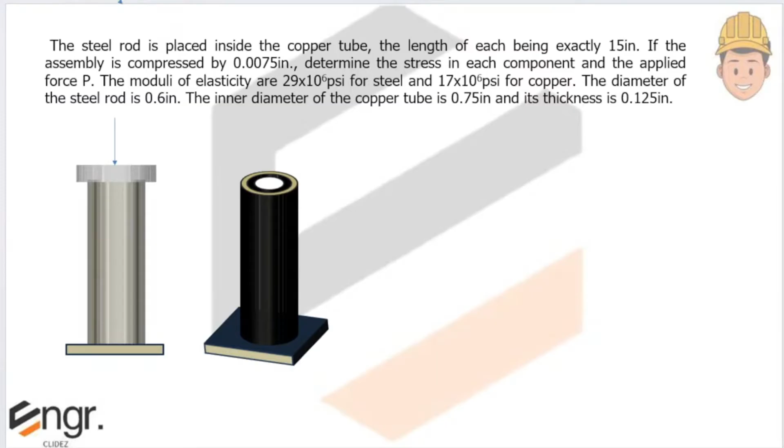Now, I think na ito lang muna yung last. Tapos sa remaining meetings, ito naman, yung mga remaining problems. Medyo marami pa kasi. Now, itong problem na to, merong approximate na method. Meron ding actual method. Na yung first na ituturo ko is yung actual method muna, para magets nyo talaga yung concept dyan, what we are trying to solve sa problem na to.

So in this problem, we have daw a rigid bar BC. And it is supported by the steel rod AC na merong cross-sectional area na 0.25 inches squared. We have to find the vertical displacement of point C caused by the 2,000 pound load. Use E equals 29 times 10 to the 6 PSI for steel. So yung first natin isosolve dyan is the deformation in AC.

Now, yung bar BC daw is rigid. Diba kapag rigid, statics of rigid bodies, review natin, kapag sasabing rigid, hindi siya magde-deform. So, yung BC pala, it will neither shorten nor elongate. So, it will remain the same. Pero yung AC is allowed to deform. So, again, this is rigid. This is important sa calculation for the vertical displacement. So, first natin gagawin is to solve the force in AC.

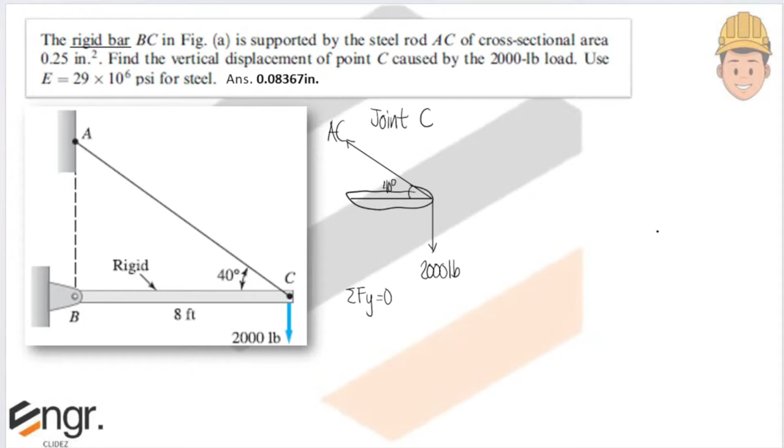So summation of forces na lang along the y direction. This is equal to 40 degrees. No need yung horizontal component. So we would have AC sine of 40 degrees is equal to 2,000. Sinum up na lang natin yung upward saka downward force. Ito yung vertical component ng AC. So solving AC, 2,000 divided by sine 40, we would get 3111.45 pounds.

Now notice na itong AC, naka-incline yan. Therefore, if we are to calculate the deformation, then yung deformation na makukuha natin is also parallel to this inclined length. So, parang ito yan. Ito yung AC. So, once solving the deformation, ito yung makukuha natin, parallel sa member. Delta AC. Yung formula ng deformation is equal to PL divided by AE. Now, alam na natin yung force. The force is equal to 3,111.45. Naka-pounds na yan. No need to convert.

Then, our length naman is still unknown. Now, usually, yung students nagkakamali since yung 8 feet yung gagamitin, kasi yun yung explicitly nakalagay sa problem. But again, we are looking at this length. Yan yung member na kinoconsider natin. So we have to solve the length of AC. We can do that by using trigonometry. Now we have 40 degrees. Ito yung side na adjacent sa kanya. Tapos yung AC naman, yan yung hypotenuse. So what trigonometric function relates the adjacent side sa hypotenuse? Di ba? Cosine.

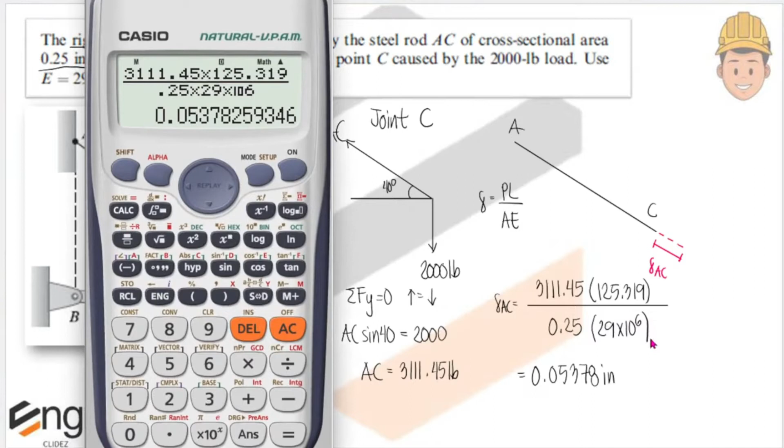So, naka-inches na yan. However, hindi pa yan yung sagot, since this is still the deformation of member AC. Hindi pa yan yung vertical displacement of point C. Yan kasi yung hinahanap natin sa problem. So first, I will discuss the actual way talaga, kung paano mo masosolve yung vertical displacement dito sa point C. So ito yan.

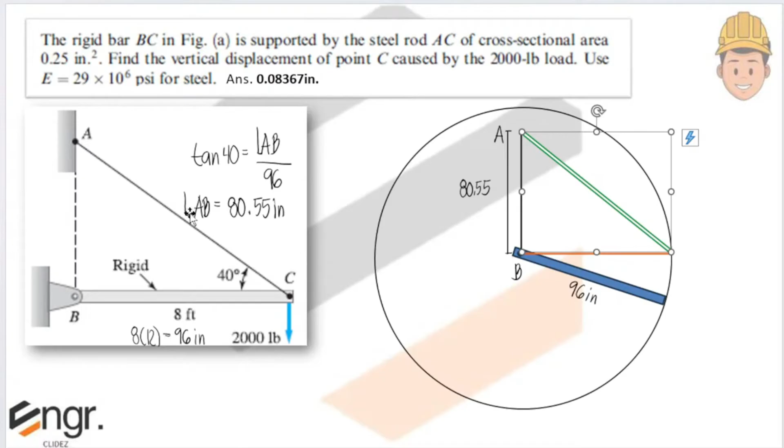This is BC. At the initial condition, it's just horizontal. So, this is BC. And then, this distance is AC, cable AC. But once the load was applied, AC deformed, it elongated. So that's why the bar moved down. So the final length is this. Still from point A, but it has elongated up to there.

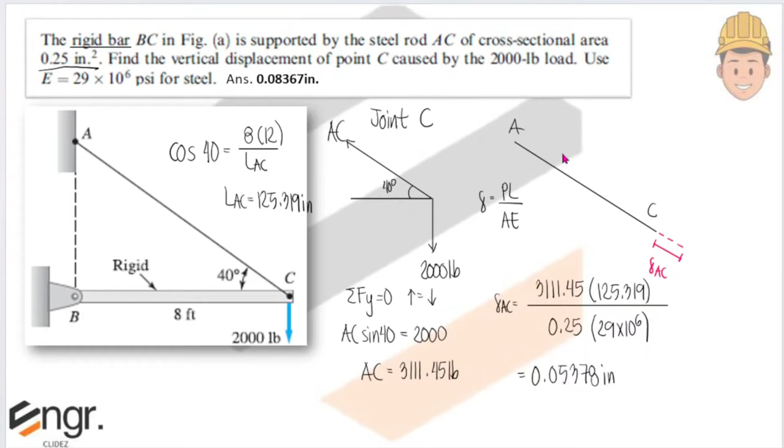So let's label it. This is C. And this is C prime, the final location of C. And this length was originally 96 still, but we don't need that in our calculation. What we need is this triangle. Now, the one in purple is the deformed length. LAC is 125.319 plus the deformation of AC, that's its total length. So LAC prime is equal to 125.319 plus 0.05378, which becomes 125.37278. So we now have AC prime.

Now, we have three sides of the triangle. When you have three sides, you can apply the cosine law to solve any interior angle. Now, what interior angle do we need to solve? We have to solve this interior angle, since once we solve that, we can get the vertical displacement. The vertical displacement is essentially what's being asked, the vertical displacement of point C.

This is the initial point C. This is its final point. So we are trying to find this vertical distance. To find it, we need this angle. Then just subtract 90 degrees so we get that smaller angle, because this was initially perpendicular. So solving this angle, I'll label it as theta.

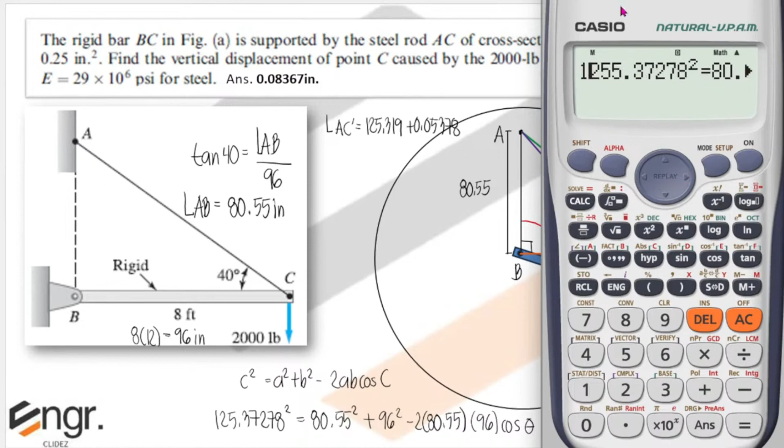Teka lang. Bakit syntax error? Dalawang multiplication symbols pala. Bakit can't solve? 1, 2... okay. Naging dalawa yung 5 dyan. Ayan. So, we would get 90.05198271. Yan yung theta. 5 decimal places.

So, try to notice na itong angle na to, maliit talaga yan. So, solve natin yung maliit na angle na yan. This is equal to alpha. So, alpha is equal to theta minus 90 degrees. Medyo obvious naman, minus 90 yan. Yung matitira na lang is itong nasa decimal. So, 0.05198 degrees. Lagyan ko na lang ng A equals theta minus 90. So, kapag meron ka ng alpha, you can now get this distance.

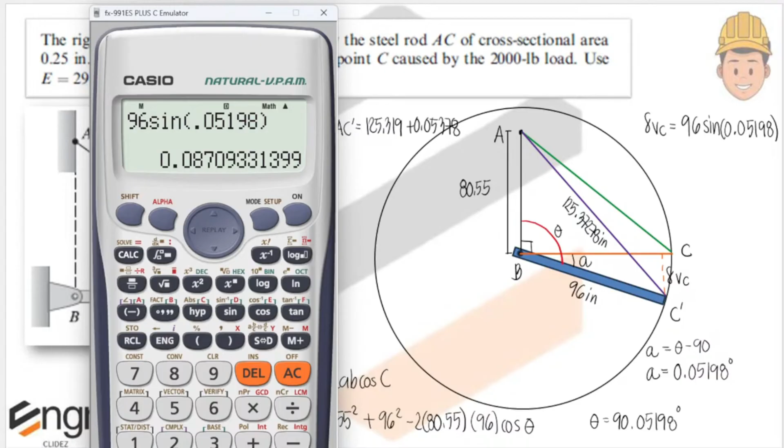Ito yung vertical displacement at C, or delta VC na lang. So, delta VC is equal to, ano yan? Diba, this is 96. Yan yung hypotenuse ng triangle. Tas, ito yung opposite to the reference angle. So, automatic na lang, 96, then sine of this angle alpha. Now, angle alpha is 0.05198. So, calculating the vertical displacement at C, we get 96 sine 0.05198. Ayan. So, magiging 0.087.

Tapos, naka-inch. Ayan. Now, ito yung actual talaga na sagot. Pero, dun sa libro, ito yung nasa answer key: 0.08367. So, makikita nyo naman na up to the second decimal place, same lang sila. But essentially, merong discrepancy since naka-inches kasi yan. Usually, kapag mm, walang masyadong difference.

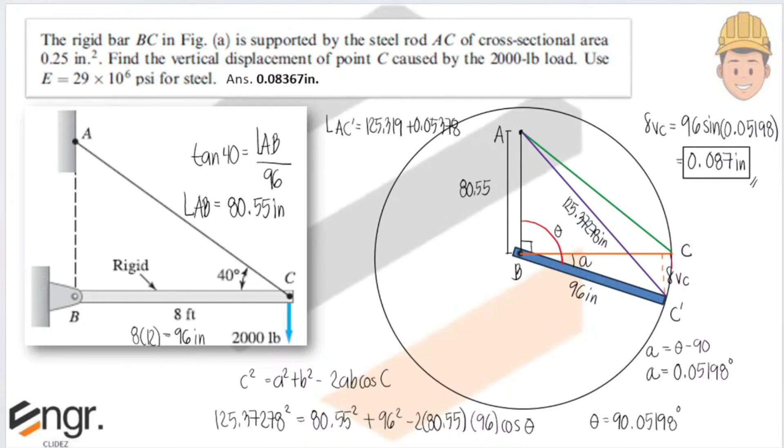Now, ano naman yung approximate method? Sa approximate method, since yung deformation is very small compared to the original length, tinitreat na lang yung ano dyan, di ba? This is essentially an arc length. Naka-arc yan siya. So, parang ito yung figure kapag doon ka sa approximate na method. Diba, nag-deform yung AC by a certain distance. So, this was equal to 0.05378 inches. Now again, instead na naka-arc, tinitreat na lang siya as vertical distance. So, this would be the vertical displacement at C.

Ayan. Now, from this point, yung deformation ng AC, just draw a line perpendicular to it until it will intersect dito sa vertical line dyan sa C. So, this is perpendicular. Ito yung approximate method. Mas madali siya compared sa actual talaga. So, 0.05378 yan. Tas, ito naman, label natin as vertical displacement of C. Now, this is perpendicular. Importante yan para ma-solve natin yung angle.

Now, what we can do is, we can extend a line horizontally. Now, 40 degrees yan with respect to the horizontal. Ibig sabihin, yung angle na to is also equal to 40 degrees. I hope agree lang. And then, if this is 40 degrees, this is 90 degrees in total. So, 90 minus 40, this is 50 degrees. So, meron tayong adjacent side to the reference angle na 50. Then, itong side na to is the hypotenuse, kasi opposite siya sa 90 degree angle.

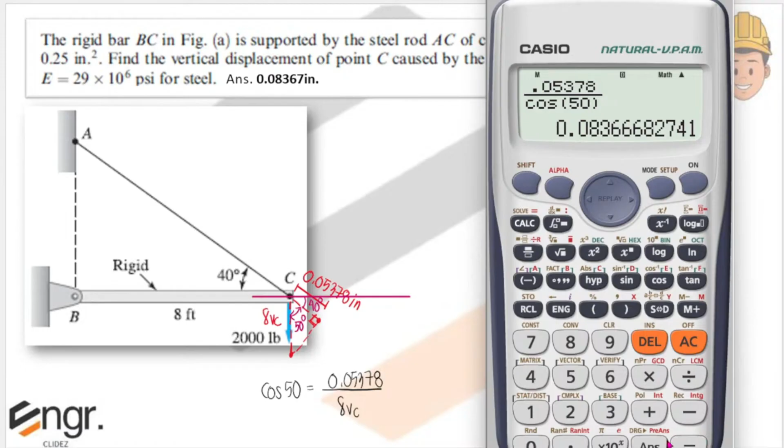So, we can just use the sine function. Cosine pala. Adjacent, tapos hypotenuse. So, cosine of 50 degrees equals adjacent, which is 0.05378, then our hypotenuse is delta VC. So, input na lang natin sa calculators, 0.05378 divided by cosine 50. So, we would get 0.0837. Yan yung nasa book talaga. So, delta VC is equal to 0.08367 inches.

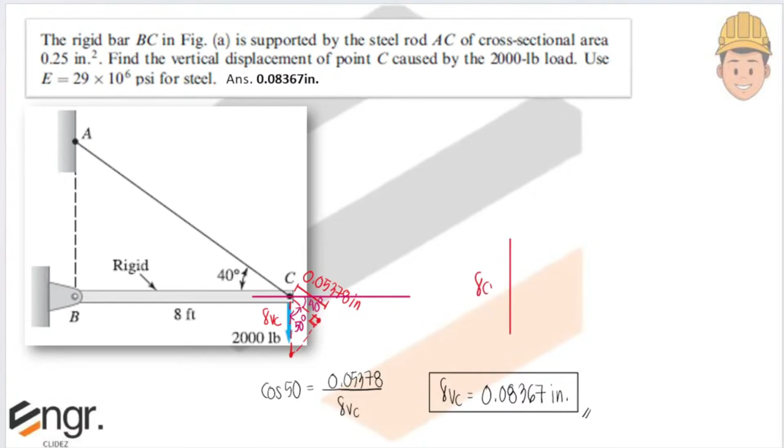Now, if you want to zoom in the triangle, parang ito siya. Delta CV, then deformation ng AC. Draw a line perpendicular to this line hanggang mag-intersect siya sa vertical line. And then, ito na yung hinahanap natin. And this angle is equal to 50 degrees. Then, 0.05378. So, ganyan lang. Usually, sa mga exams, sa board exams, ito lang yung ginagamit na method. Yung approximate method na lang.

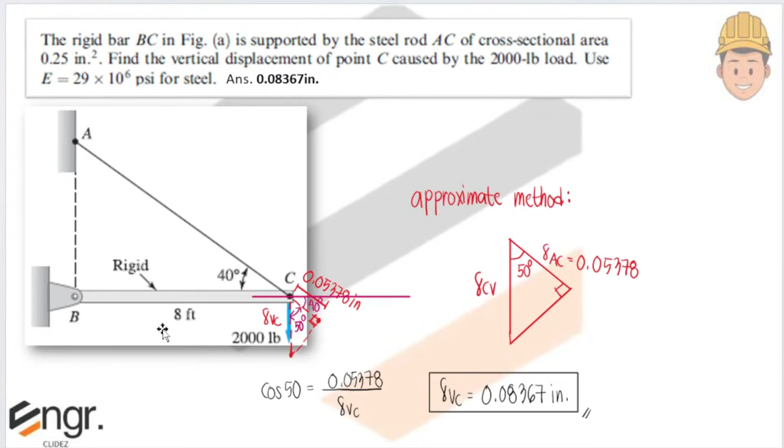Sige, so, dito na lang muna. And then, sa next videos natin, we will discuss the remaining problems.